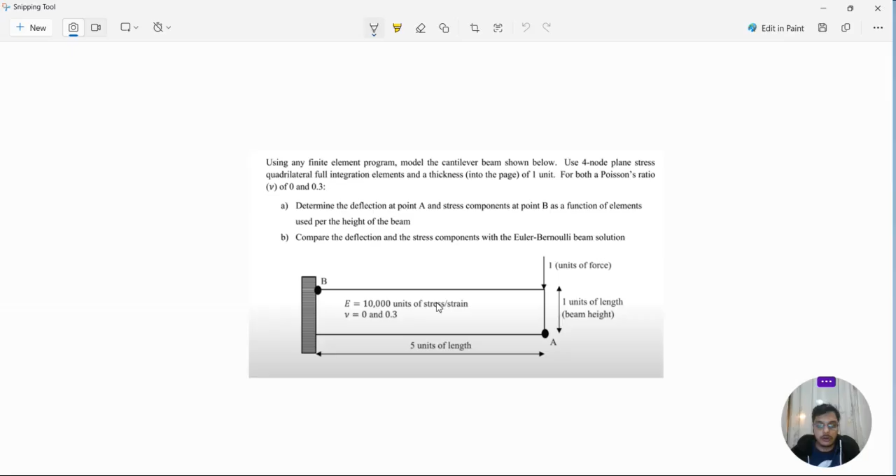Also we can do all other things as per our accountability to understand this particular problem. So this beam is 5 units of length and 1 unit in the vertical direction. So it's a 2D case in general, and we have a Young's modulus value of 10,000 units. You can assume any unit for your use case, and Poisson's ratio of 0 and 0.3.

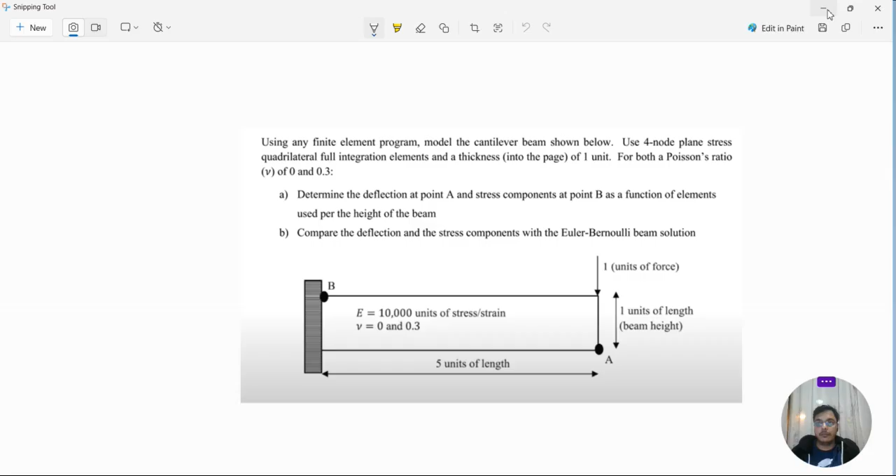So let's try to first of all do it in Abaqus. As we have already seen in our first example how we have to quickly interact with this interface. So make sure whenever we do anything, we do a step-by-step process, like first initiate with the part, property, assembly, step, interaction, and so on. As the examples go on in this series, we will see how we can use all other modules that we haven't selected so far.

But as initially we say, we have to start with the part. So we double click here. We are just modeling the beam, and it is a 2D deformable. And as we know, the base feature wire is mostly for one-dimensional stuff, and shell is like 2D. So that's what we are doing. Approximate size we all know.

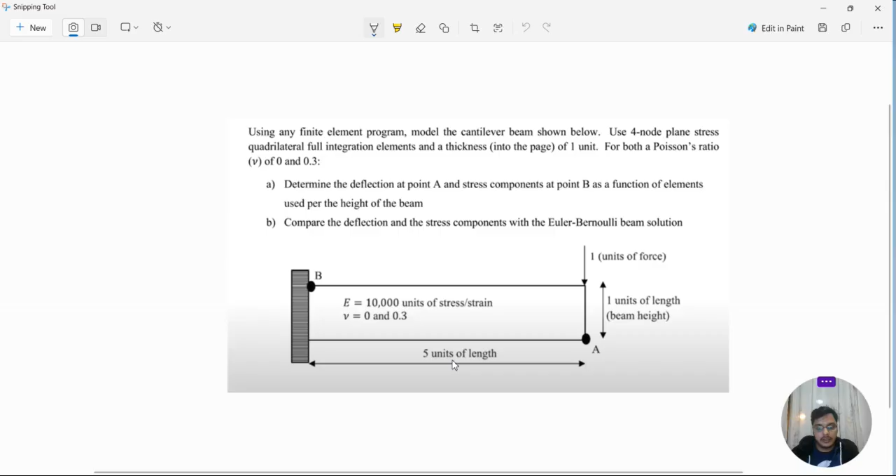So since we have to check the length of it, we can see it is 5 units in the x direction and 1 unit in the y direction. So that's what we have to do. Select the rectangle, give the initial coordinate 0,0, and then now it is free to move, and then we give 5,1. So that's how we create a beam, and click done. So this is our CAD file already generated.

Now we have to assign the property. To assign the property, we have to give a particular name to it. So let's say today again we are giving it steel, and now we can define the density, mechanical properties, thermal properties. That's what we will see later. Today we are only seeing elasticity. If you go deeper into the theory, even in elastic we have different material models like anisotropic, orthotropic, isotropic. The simplest one is isotropic. That's what we selected today.

Young's modulus. So if we see the problem here, it's given 10,000 of any unit. So we give the same, 10,000. Now the Poisson's ratio given is 0.3. That's what we have given here. Nothing more than that we have to define here. That's it. It's done. Now we have to define the section. So for defining the section, let's say it's the beam part that we are going to deal with.

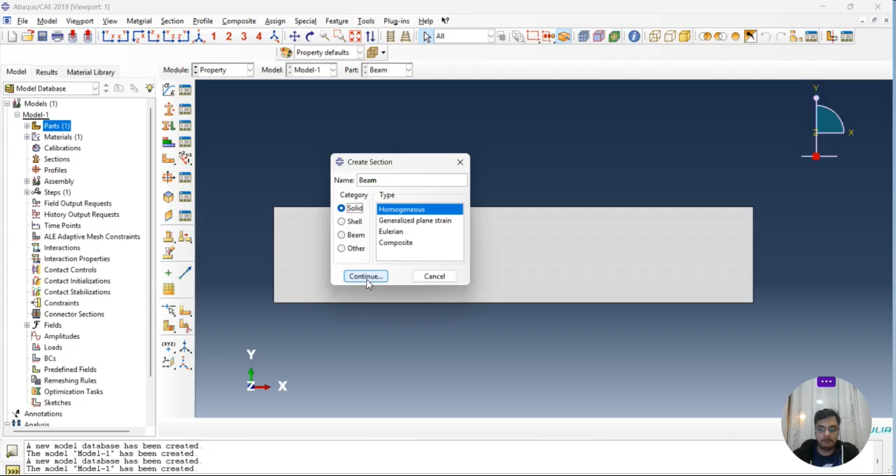So either you can define this with the help of a beam, the same beam element, but today the type of element we are going to define is the solid, homogeneous part for this particular case study. So we selected that, and we have already defined the material.

Again, the plane stress and strain thickness is something we've probably seen. It's given as only 1 unit of thickness into the page, but let's say if it's 2 or something more, we'd have to activate this and give a particular value like 2 or 3 as per our requirement. But if it is 1, let's make it by default. We don't have to change it.

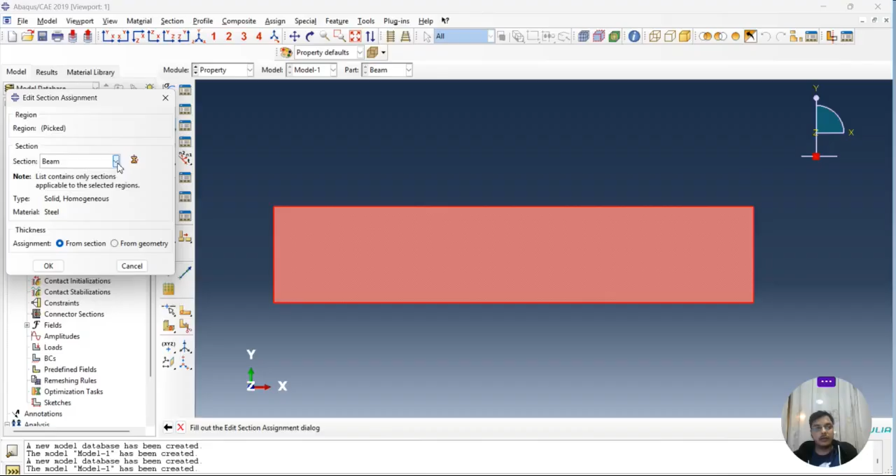Now we have to assign the section. So select the regions to be assigned. We select this particular region and say done. With beam we only have one type of section, so by default everything is fine. If there are other types, you have to select exactly what section you want to define. Once the color gets changed, everything is fine, which means we have correctly defined it.

Now another part is to do the assembly. Again, we have only one element. If we had more elements, like nuts, bolts, and other types, we would have to select each one here. For that, we go to Instance. We can also go here in assembly, just put the plus button to get the drop-down text, and click on Instances. So we can click - we only have one, the beam, that we have selected. So we say okay.

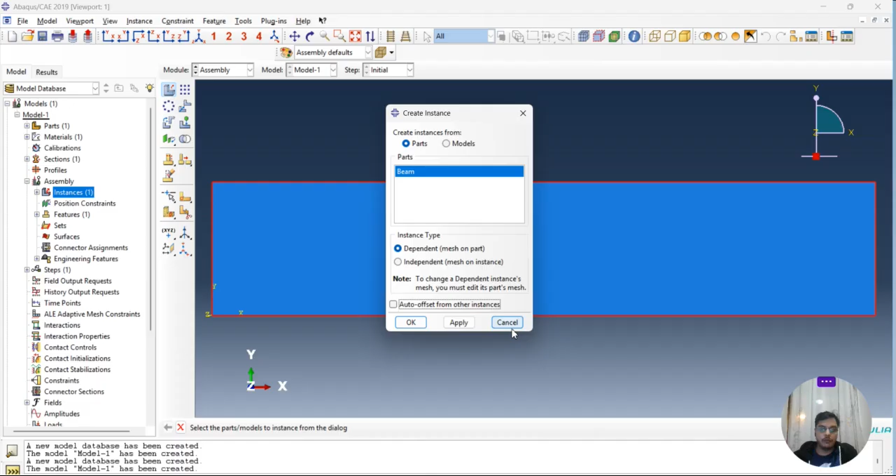So we got it. Let's say if we had another part, we could quickly go again and put it back here, but we don't have it, so we just remove it. So the point is, in this phase we start doing analysis - before that, whatever was done was just CAD. So we have defined the assembly.

Now it's the step. So we have to understand what exactly we need to define - one is a boundary condition, and one is a load condition. So we go to Step again on the left side panel. The initial step is already defined, which only tells us the initial boundary conditions. Here we cannot define the load, so to define the load, we have to create another one.

Let's say, apply load. Make sure whenever we create a load or a new step, to give it a proper name - it's 'apply load', and make sure it is static general for this case. Soon after some time we will see some other types of analysis also.

Now this part is really important for today's analysis. We won't go into too much detail, but whatever load we apply is regulated by the CAE software through the incrementation size. So if I try to change the initial or maximum increment size and the number of increments, it directly applies to the load, because in Abaqus CAE everything happens with respect to numerical methods or incrementations. So that's what we'll see - how exactly the solver solves it.

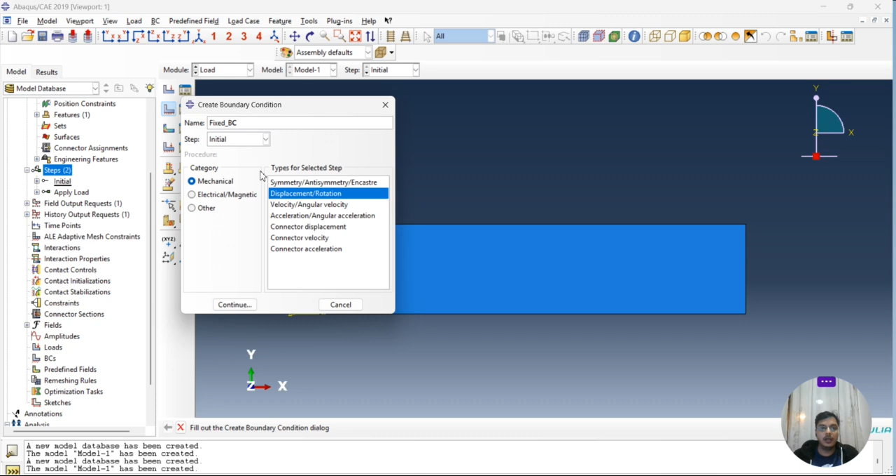As we define, we first have to make the boundary condition, let's say a fixed boundary condition. Make sure we apply it to the initial step, then give the displacement rotation. We continue, and then select the edge where we have to define it - if you see the example, this is where we define it, and we just click OK.

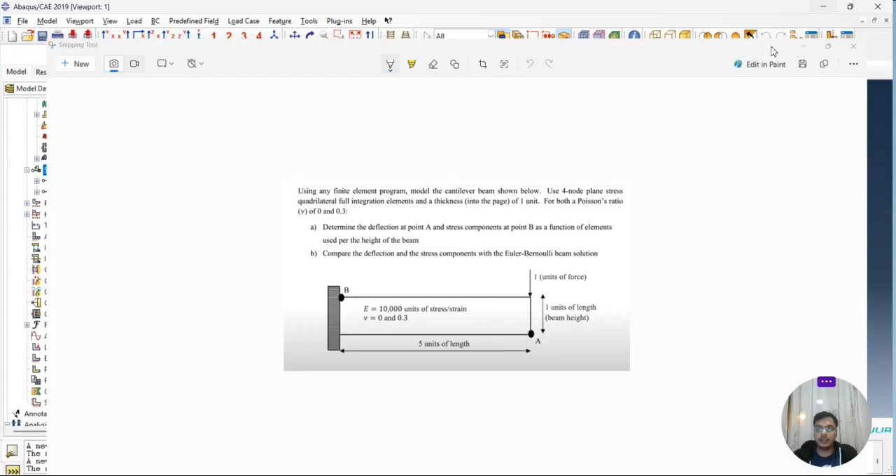So again, U1 and U2. Make sure UR3 is not activated because the type of beam we have taken is a solid beam. If we had taken the type as beam defined earlier, then we'd have to define the rotational degree of freedom also. For all solid, bar and truss elements, we don't have a rotational degree of freedom.

For buckling analysis it's a totally different case, but here we are not going to deal with it. So define U1 and U2 as 0. It will fix that particular boundary, and that's it.

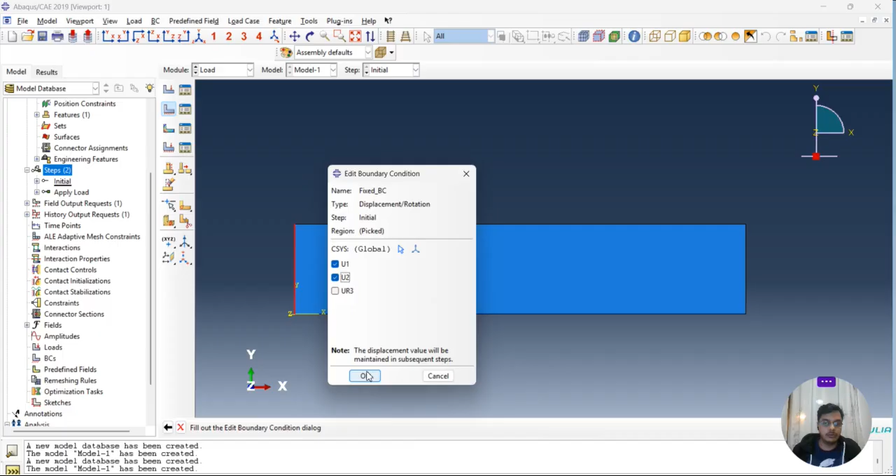Now we have to apply a load. So we say apply load - it's not going to apply at the initial step, but we will apply it still. We just give a concentrated force to this particular edge, and then we'll check how much we have to give. It's 1 unit of force. So we go to done.

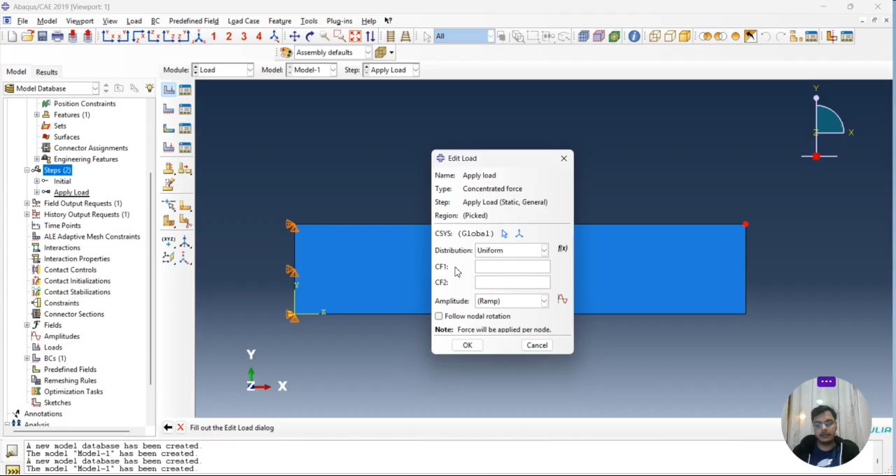Then we have CF1 as the axial axis and CF2 as the vertical axis. So we don't apply to the axial, we just give 0, and we have to give 1 for vertical. Then we'll check how it is.

So it is applied at the top side, but it should be applied to the downside. So we go to the load here on the left side, double click and change the direction. Just keep -1 and it will change the direction. That's it, everything is fine.

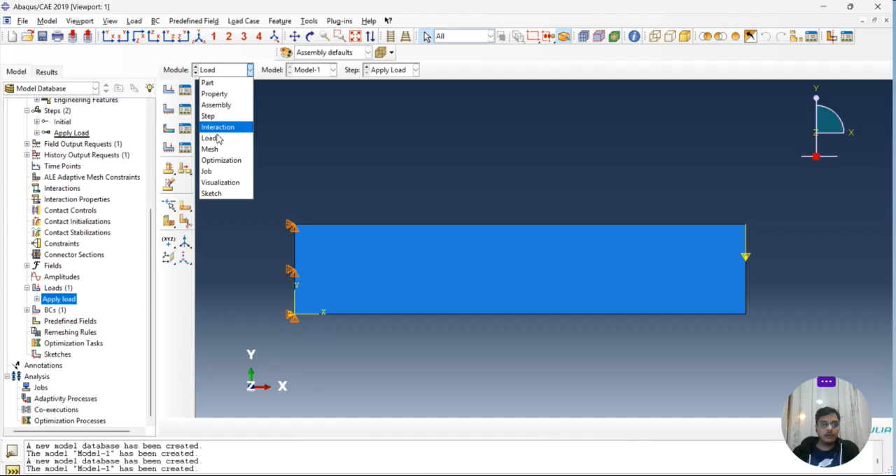Now we have to define the mesh. For defining a mesh, we can either define it with seed edges or with the whole part. If we define it like that, first we have to define the part, then define a global size - so 0.5 will be applied to the whole part, like each quad element will be 0.5 only. Let's check it out.

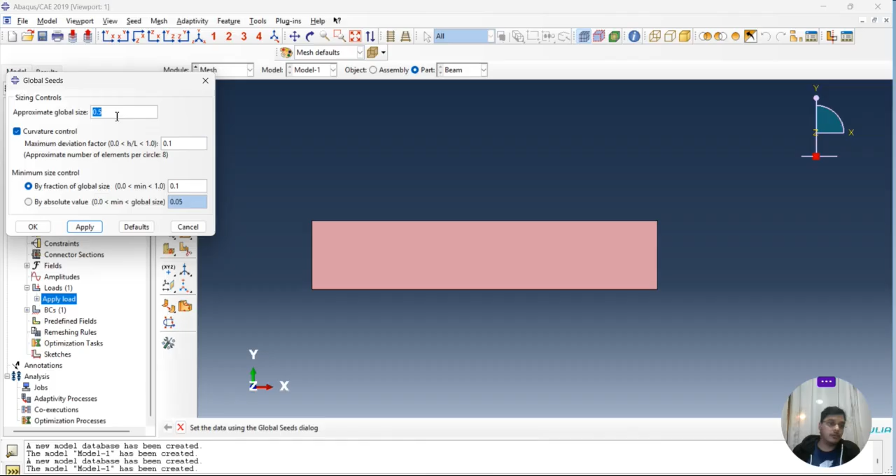It's going to be like that. Then we have to mesh the part - say yes. This is how it is generated, but I don't want it. I just want it with the help of seeds only.

So I have to select a particular edge for the seeds. Let's select this, I said done. Then we can select it by size or by number - again we select by number. I want 4 on this particular edge.

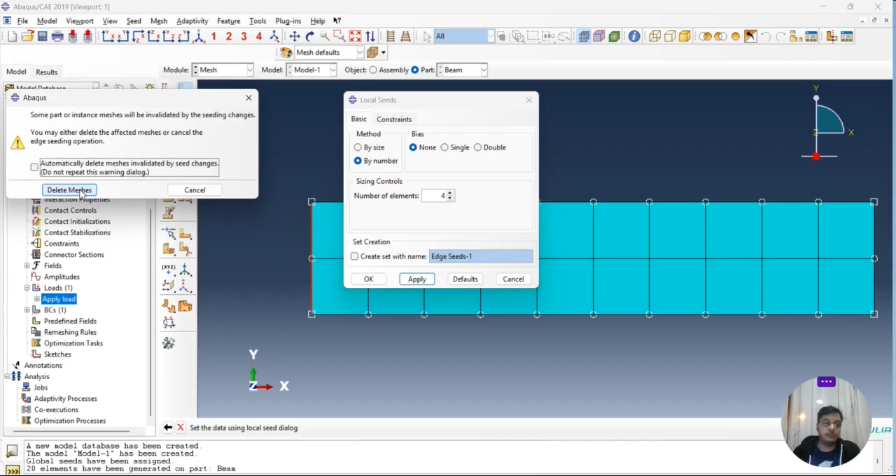And it asks if you want to delete the mesh generated before. You say yes, so we delete it and apply the new one. We click OK, then we mesh it again, and we can see here like 40 elements were generated in the journal. So again, this is all okay.

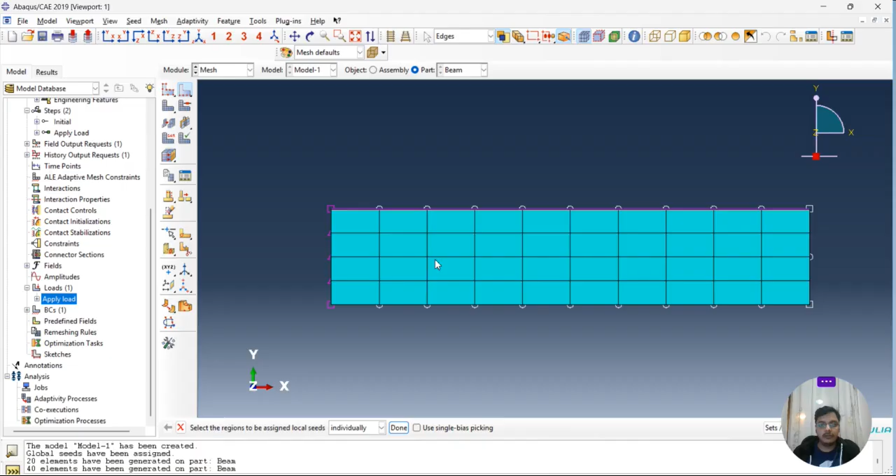You can play with this mesh and make a really good mesh - it really depends on your accuracy needs. I just want the top edge to be even finer, let's say 15 is good for me. I said okay, delete the previous mesh and apply it here.

Now the important part here is I also have to define the element type. To define the element type, it's really important that we choose the correct family. Make sure this is a plane stress problem, so we select plane stress, and then we have to choose the geometric order.

It's linear or quadratic - let me explain what linear and quadratic exactly mean. For linear and quadratic elements, it depends on how the nodes are defined. For linear, it is only 4 nodes, but if it's written as 8 node, then we have to select the quadratic geometric order.

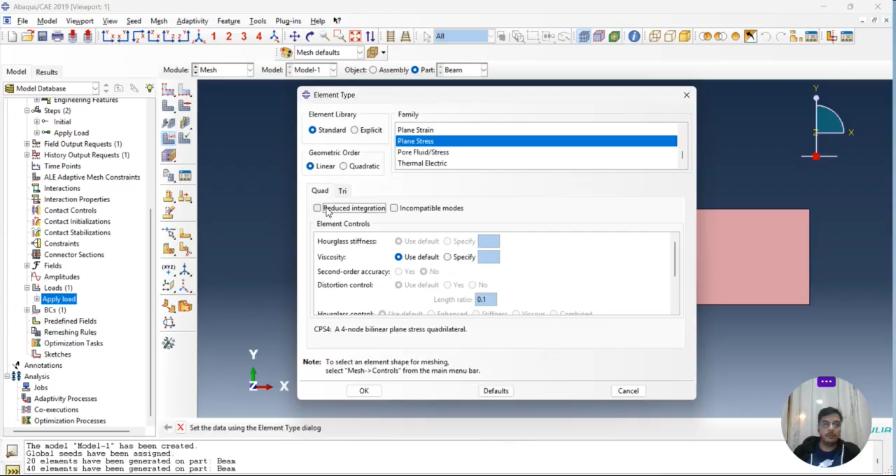This reduced integration is selected by default, but make sure they have asked for full integration. We have to go through the theory part because that's where all the information is defined. So we remove this to get full integration, click OK, and mesh the part. So this is how the geometry is defined.

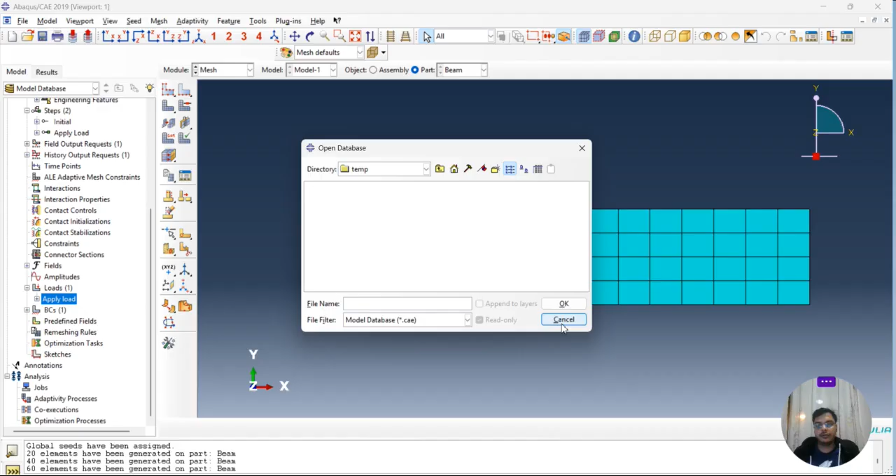Now just go to the job and submit it, and make sure to always save it in a particular directory. If you don't save it, it will go directly to the temporary file. Defining a directory is really important. If you want, you can put it into a particular file so you always know where exactly the files are going.

So we create it and name this as a beam analysis, say continue, and this is fine by default. Then we submit, and after submitting we can also monitor it. The point is we also have to understand how exactly this analysis happens. When you submit it, it tries to create an input file .inp, which contains all the boundary conditions you've put in so far. Then the Abaqus solver reads that input file, solves it, and you get the analysis.

So we go to the monitor. We can see that in a single iteration, which we'll look at more later, the analysis completed.

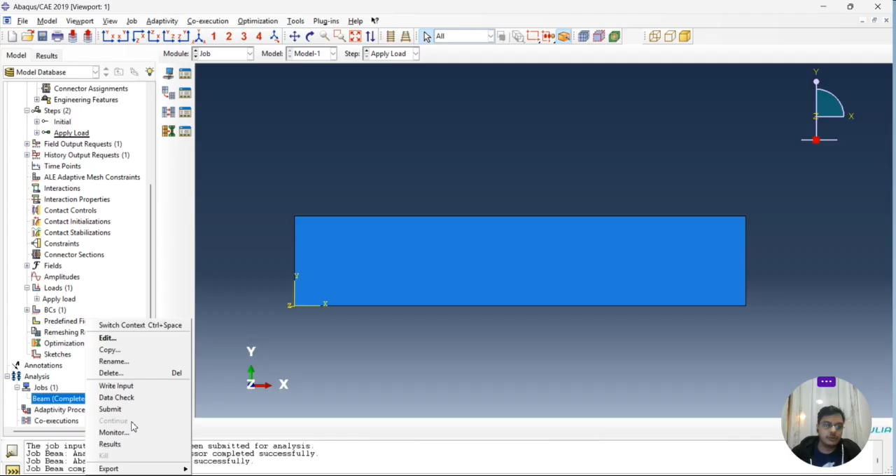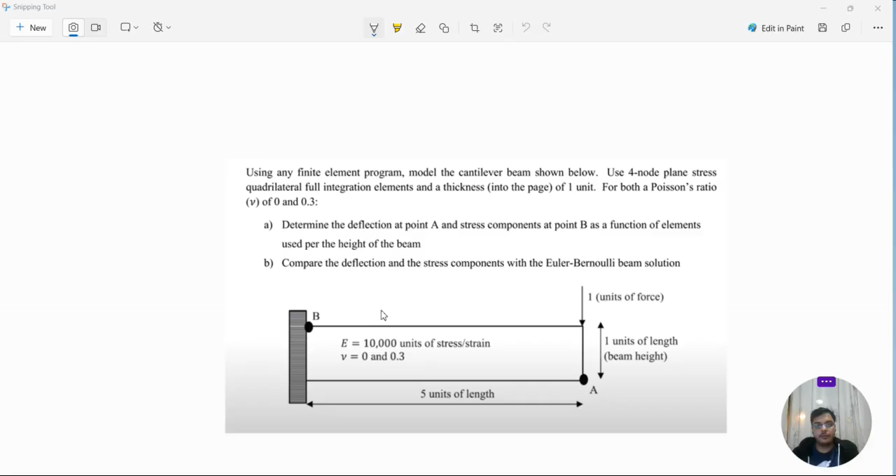Then we go to the result part, result analysis, and the undeformed plus deformed part. Here we can see the Mises stress, and we can also check the deflection or displacement. As the question asked, we need to determine the deflection at point A, meaning the magnitude, which we have to check.

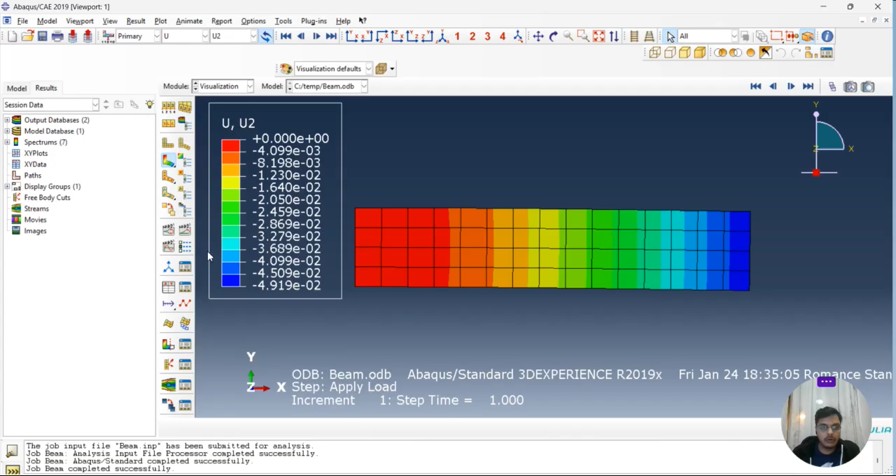We can select here, rather than magnitude, the vertical direction which is U2. Let's select U2 only for the deflection at point A, which means we select it here. We have an option called probe, and with the help of probe we can figure out exactly what the deflection is. It's probably downside, I can't quite see it, but that's how we understand it.

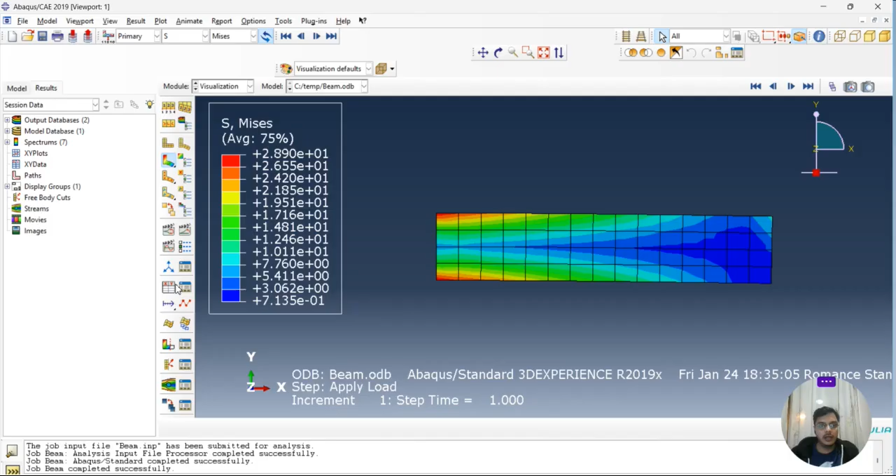Then we also have the Mises stress. Let me see where this problem is. If I go to the toolbar... okay, the probe values you can find from the bottom, and with that, here it is. So we can check it with the probe. The Mises stress is selected as default.

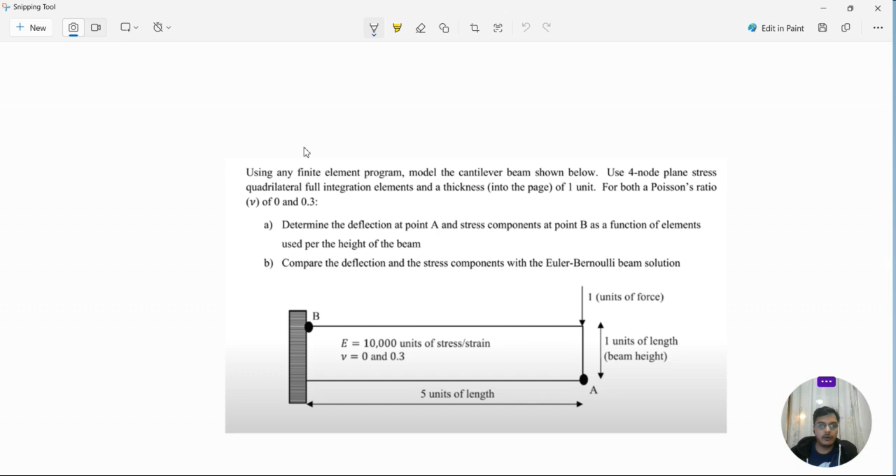What we have to do is check the stress component at point B. So we go here and just put it here. It is 28.851 in a particular unit.

Now what I have to do is select the deflection at point A. Again I go to the probe, select nodes, select node, and U magnitude is fine. Then select it here. It is 0.049 deflection downwards.

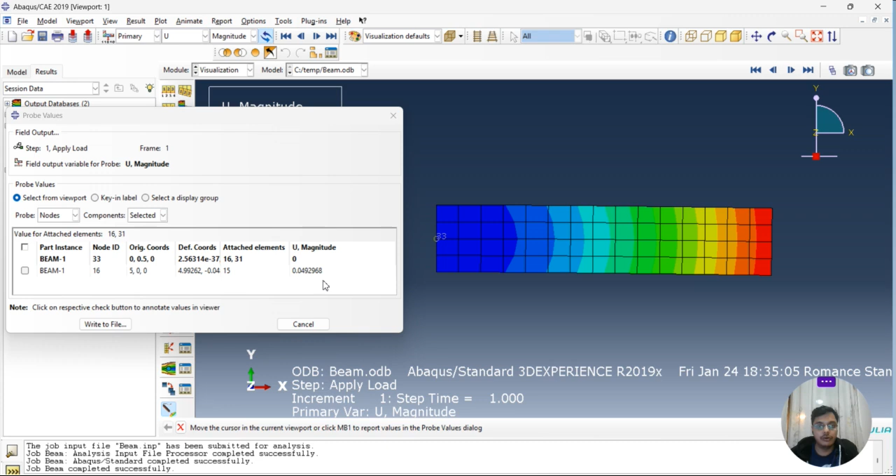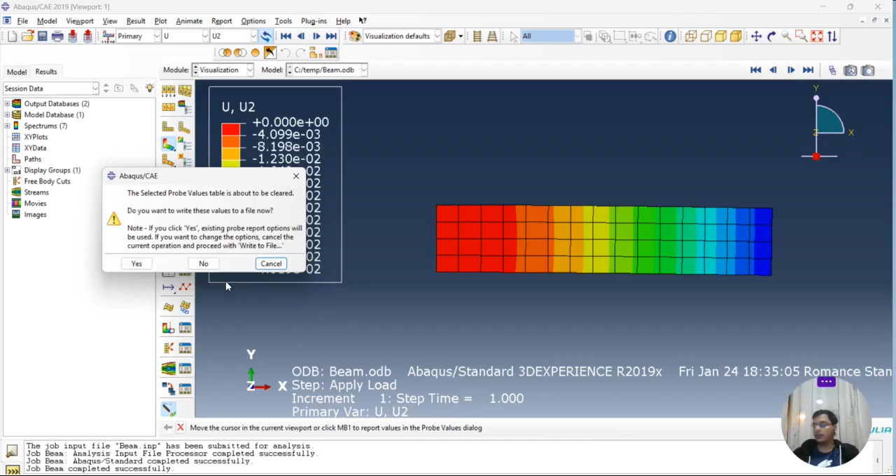You can also select it here as U2, to be more precise. Again go to the probe, select U and U2, select here. This is in the negative direction, so it is minus 0.049. That's how we deal with this particular problem. I hope you guys understand each and everything. Soon after, we will also do other types of problems dealing with buckling analysis, and dynamic analysis as well. Thank you very much.